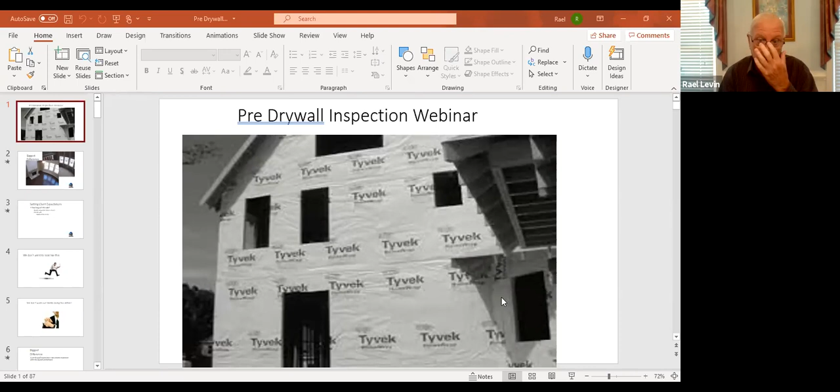So when we talk about pre-drywall inspection, we'll cover what we look for and what we see, and why it's important to do, certainly if you're doing new construction, and also on older homes on a resale if there's been a renovation or one in progress, it would be a good idea to have it checked out before the walls are covered.

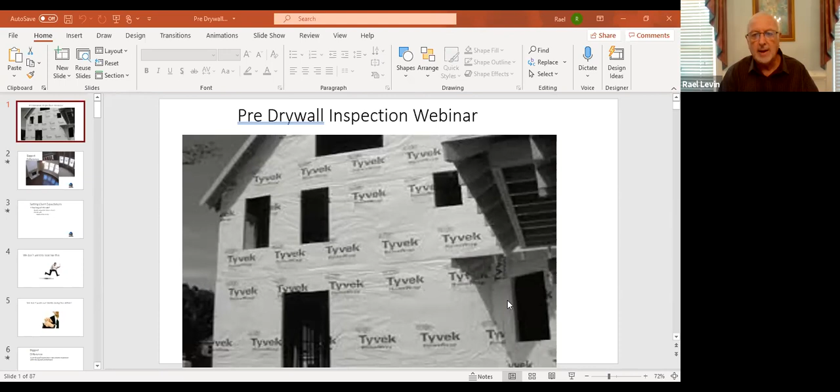So the biggest difference - let me get into the bigger slide, we'll be able to see a lot better. There we go. Okay, so here we're looking at the pre-drywall, so we're able to have a good look at the installation of everything here. We're looking at wiring, and where the fireplace is inserted. It's really important for us to see the actual structure.

Things like headers over the windows and what supports those headers. In the walls, how is the electrical wiring done? We can see our heat ducts up here, we can see our joists - this is the second story floor joist. So we can see everything when it's good and open, which is a lot different than when we actually look at it completely covered. Then we can't really have a good look at the components that are there.

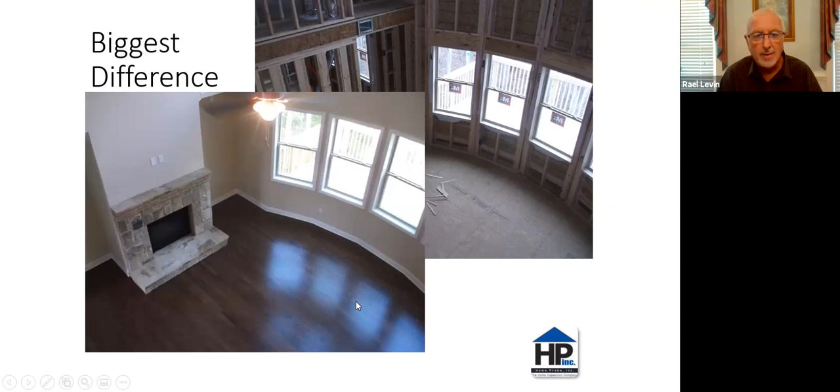What we can do is test the electrical outlets, turn on the light fixtures, and see that they're actually operating, but we don't really get to see what's behind that drywall or paneling in the walls. So we need to set the client expectations, and that basically comes down to a phone call to our office by your client, and also from you, the agent.

So they want to know, well, how long is the inspection going to take? A resale inspection's going to take about 3 hours. What we're dealing with there, in most cases, unless there's been an estate sale or perhaps a sale where the seller has been transferred for business and now the home is empty, it'll take a little less than 3 hours. We're looking at maybe between 300 plus items on this inspection on a resale that need to be checked.

We'll actually cover how that's done in just a little while, when we talk about the home inspection groups that actual inspectors can belong to and get their continuing CE, just as you can and are needed to do for real estate agents. So the resale inspection takes about 3 hours, pre-drywall perhaps an hour on site.

So we don't want to look like we're really rushing through everything. The big difference is we don't want our clients to be like, what's with the watch, what's going on here, how long is this going to actually take to get done, and they're getting bored. I can share with you one instance where I had a client where I wanted to do the home inspection.

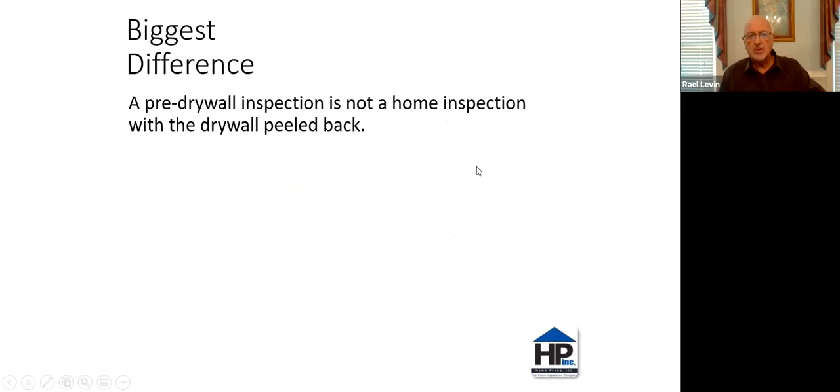So really the biggest difference is that a pre-drywall inspection is not really a home inspection with the drywall peeled back, because we look at different components and use a different criteria.

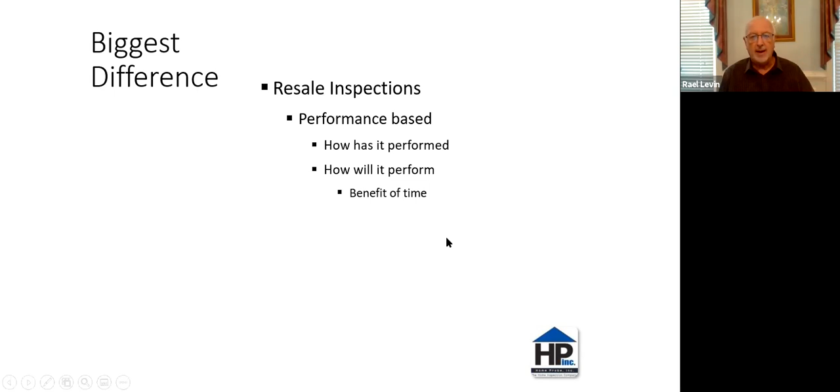Let's look at the differences between a resale inspection and new construction. Performance-based is what the resale inspection is all about — how has it performed to this point, and how will it perform going forward? We've got the benefit of time there to inform our clients about what we're looking at.

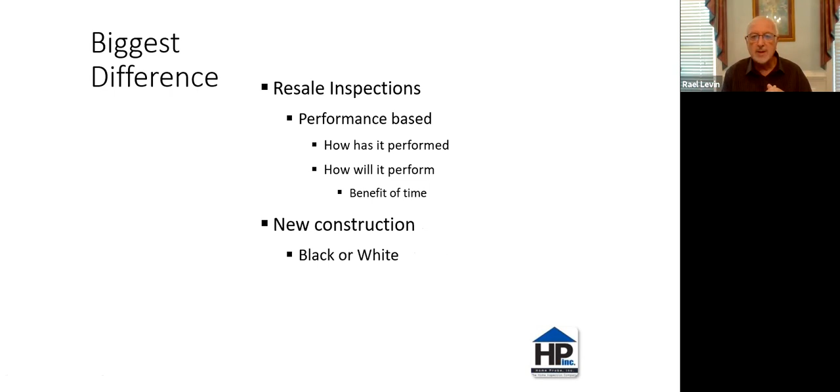With new construction, it's black or white. It's either done correctly or it's not. Has the structure been put in correctly or has it not? Are we missing some components that would be required?

So that's the difference — is it installed properly? We need to look at things like the HVAC system, the hot water heater, the electrical work. Has it been installed properly? What really overrides even the county inspections or the code is the manufacturer's instructions, because if those instructions for installation are not met, it basically voids any kind of warranty on the unit. So there's no benefit of time involved.

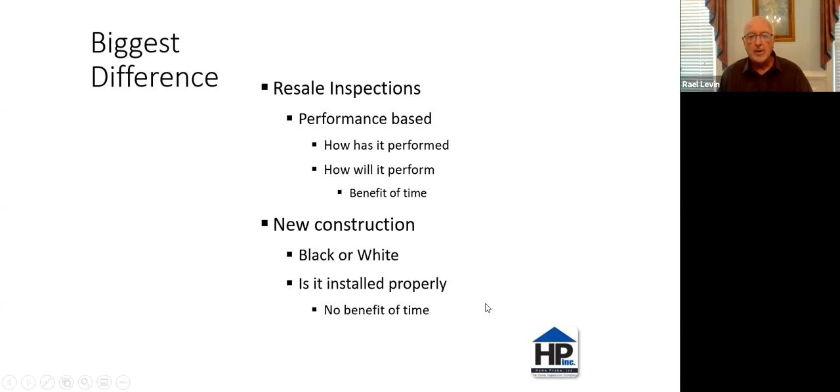Many times with new construction there will be limitations. The inspections are broken down into limitations and what needs to be taken care of — and recommendations, if there's a defect that needs to be repaired or adjusted. Those are the two main items to see in that inspection report.

So what's actually involved in new construction is we need to reference the International Residential Code. We have certified IRC inspectors in our company at HomePro, and these are the folks doing those code inspections and conformity checks for general code compliance. Bear in mind every county and city adopts their own portions of the IRC into their own code, so there are tons of different interpretations of the IRC depending on the county or city you're in.

So the largest investment of time on a new construction inspection is in the report writing, because we have to look up the code section or installation instructions. We mentioned we're looking at perhaps an hour on site, looking at the structure and components installed, making notes and taking photographs for the report. Then we have to go back to our office and look up the code sections or installation instructions in case there were issues needing to be addressed. Clients aren't really aware of this — a lot of times they think he just looked around and was out of there, and that's not the case.

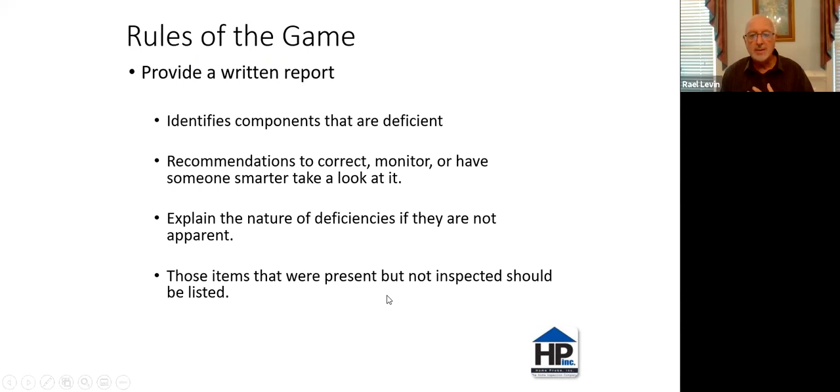The whole idea is that the inspector shall inspect the readily accessible, visually observable installed systems and components listed in the standards. With new construction and resale it's the same. We need to provide a written report that identifies the components that are deficient, and recommendations to correct or monitor - have somebody smarter than us take a look at it - explain the nature of the deficiencies if they are not apparent, and those items that were present but not inspected should be listed. So that would be a limitation.

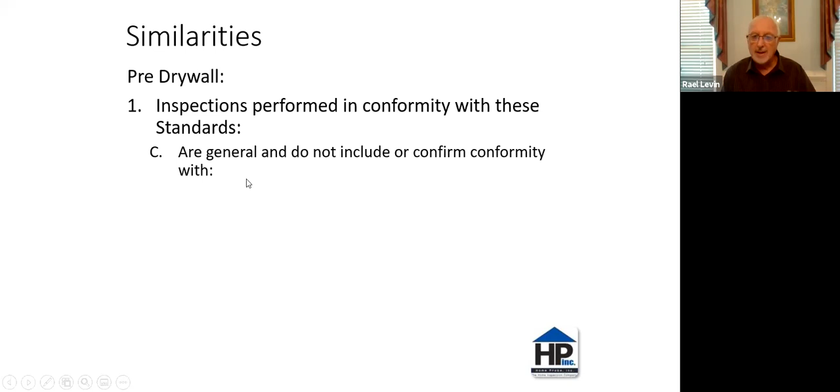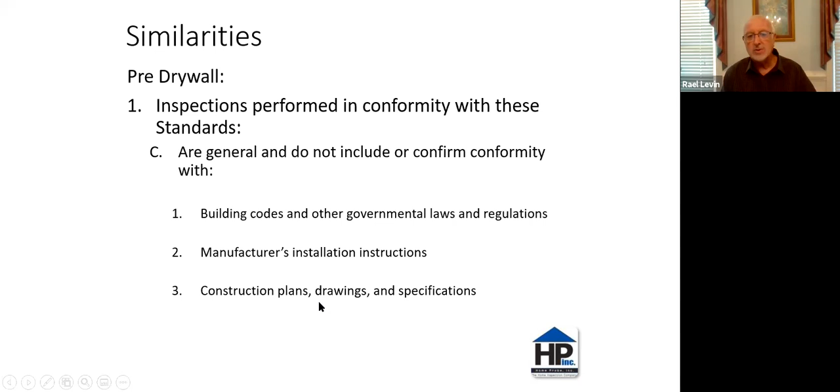Pre-drywall inspections are performed in conformity with the standards, but they're general and do not include or confirm conformity with building codes or other governmental laws and regulations, the manufacturer's installation instructions, or any construction plans, drawings and specifications. Why would we say we're not inspecting for code when we do a pre-drywall inspection? Because to the client, and to the actual builder, enforcement isn't an issue for us.

So then why is it required? It's still an education, and we're explaining what we're looking at, why it's there, and what it actually does.

That's great for perhaps a component like a furnace or a heat pump in the attic - we're cutting down on some of that heat, so the ductwork doesn't get as heated, and in the summertime it can carry that air-conditioned air a lot more efficiently through the attic. It's also fun for the inspectors, who get a drop of perhaps 10 to 15 degrees cooler in the attic when we get up there to inspect the unit.

So all these kind of questions that might come up from a client while we're there. Why would we need to do a pre-drywall inspection? Well, here's a typical example.

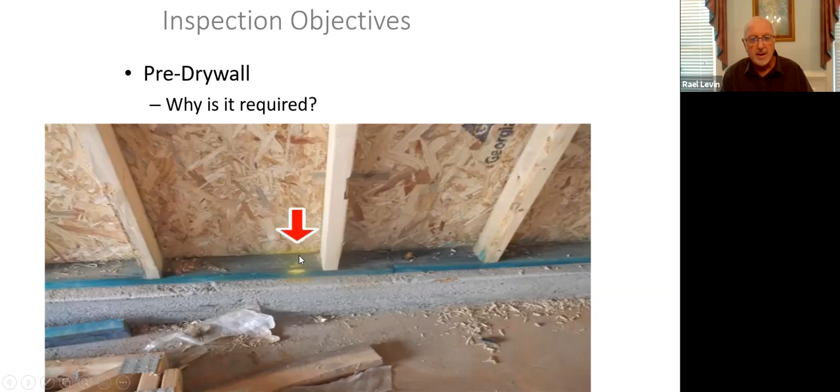Looking at the actual sill anchor spacing, there should be bolts on 8-foot centers in Canada or 6-foot centers here in the USA, and the bolts needed to be within 12 inches of the corners or any joint in the bottom sill plate. You can see here the anchor bolt, nut, and washer which holds the sill plate in place, installed in the poured concrete foundation when the concrete was originally poured.

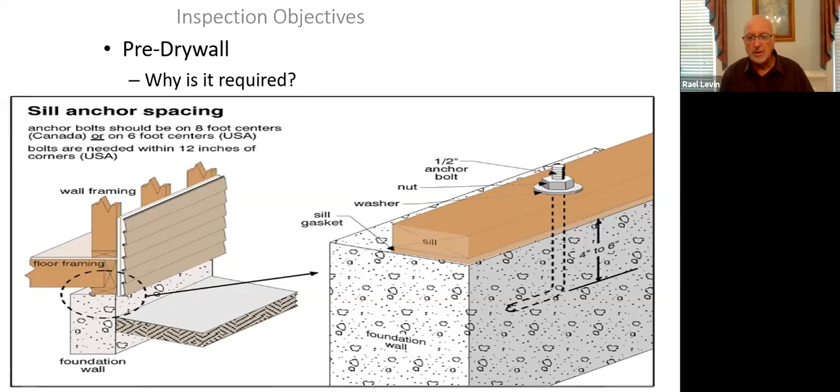So why was it there? Simply because over the years in our area we see high winds, tornadoes, etc. The installation of these bolts, nuts, and washers holds the sill plate and the whole structure together and protects it when winds come through. When the wind blows, it creates pressure or suction and sort of lifts or tries to lift the structure off of the foundation.

You can see in these schematics below how there's an uplift or shear that can actually move the whole house off of a foundation. It's not uncommon during a storm that this may happen. So that's why those bolts are there.

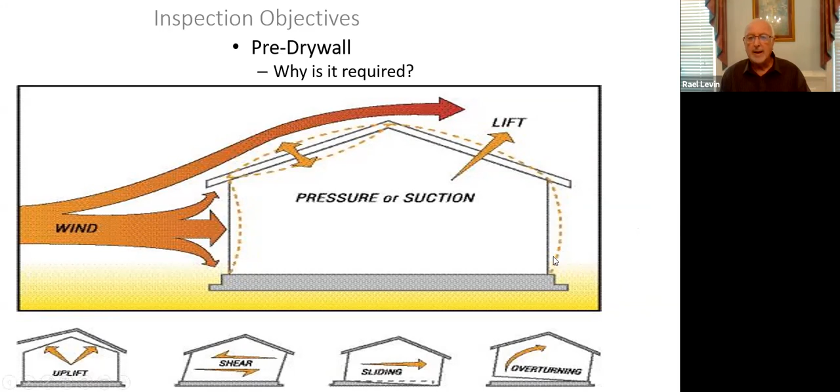Also, something that's been around for a while is what we call fire stop—fire foam or rock wool. In all the gaps or holes wherever something's been drilled through the wood structure, we install this, you can see it's orange here, which stops and slows down flame or heat coming through from one level to the level above if the fire is below.

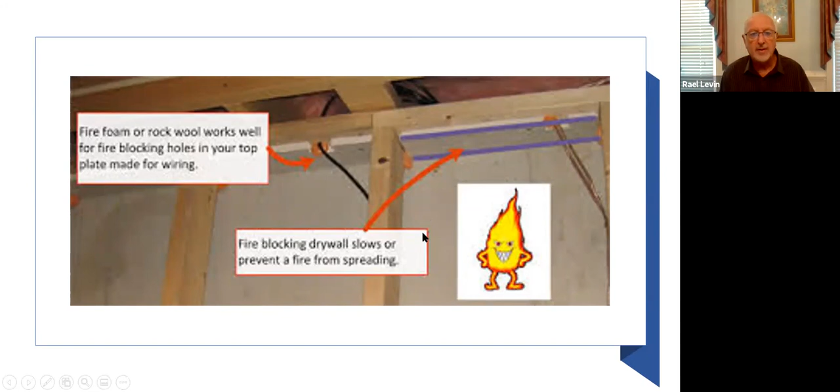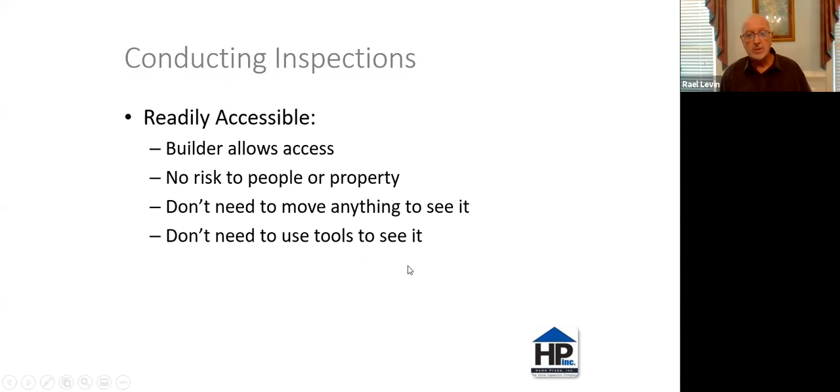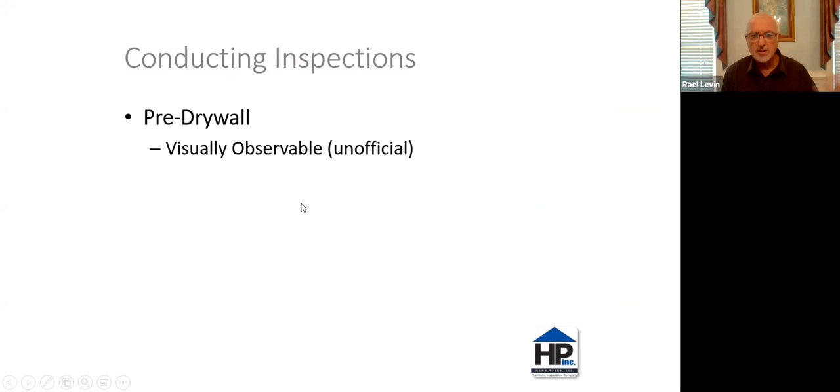We have to remember our standards: everything must be accessible, visually observable, installed components, but they have meaning. The builder needs to allow us access, and there needs to be no risk to people or property. We don't need to move anything to see what we need to look at, and we don't need tools to see it. Perhaps we don't even need a ladder taller than 12 feet to see the components we're looking at.

Pre-drywall, unofficially explained, is a visually observable component located in a readily accessible location. It's viewable by an unaided eye from a single perspective at a level of detail sufficient to permit inspection. If there's a tiny entrance to the crawl space we can't get into, that would be a limitation. Perhaps the level from the bottom of the floor joist to the dirt wasn't high enough—24 inches is the requirement. All of those things would prevent us from actually doing it visually, and that's the whole idea: we want to do that visually observable inspection.

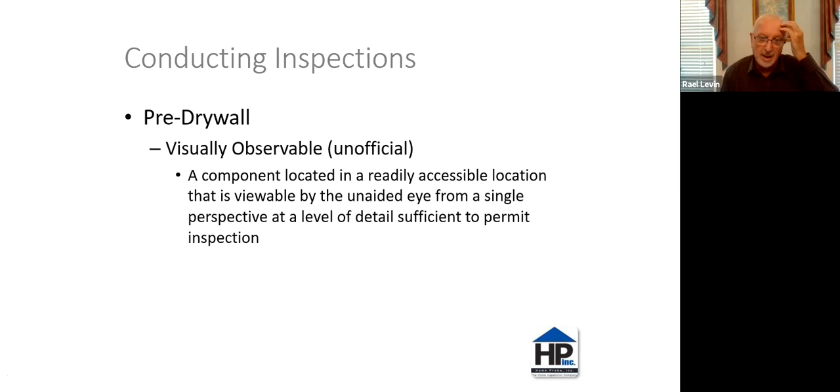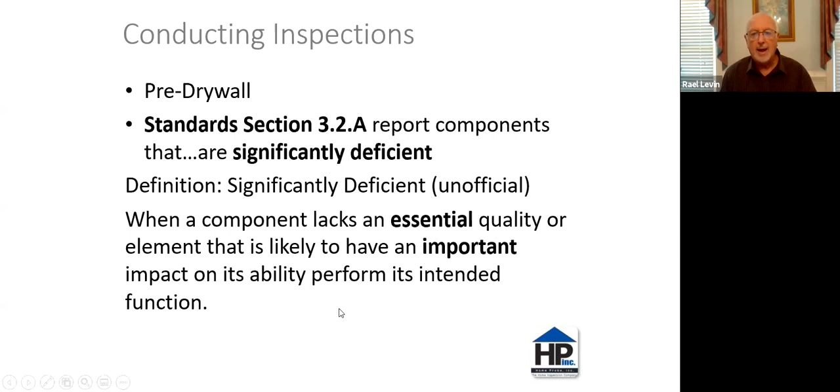We report components that are significantly deficient. So what is actually significantly deficient? Basically, it's not working—it lacks an essential quality or element likely to have an important impact on its ability to perform its intended function. Something simple might be that the AC unit outside wasn't topped up with refrigerant, so the AC system wasn't working. Perhaps there was some kind of defect with the thermostat that wouldn't allow us to run the HVAC system.

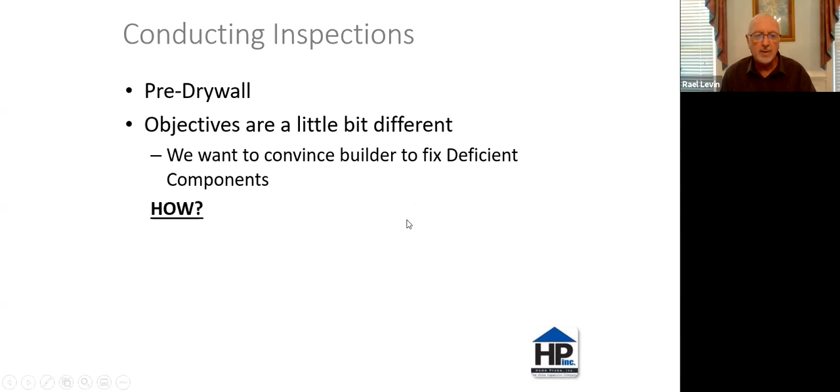But the objectives are a little different—we want to actually convince the builder to fix the deficient components. So how do we do that? We would cite the generally accepted construction practices.

So what is that? Well, material that's published by generally accepted standards writing organizations. We select the standards, and they should be written from an authoritative source.

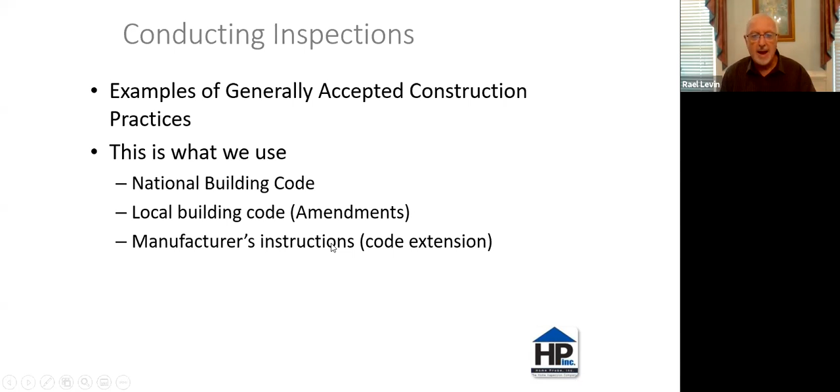And this is what we use: the National Building Code, local building codes and amendments, manufacturer's instructions or the code extension, and all the different types of home inspection groups like ASHI, National Association of Home Builders, etc. Also, Brick Industry, Engineered Wood Association, American Wood Council, Gypsum Association, National Association of Home Builders guidelines, research center documents, manufacturer's instructions. So there's a lot of different stuff, specifically when you go into new construction and pre-drywall.

When we report the deficiencies, we need to identify that deficiency, describe why the client should care if the deficiency is not corrected, if it's not self-evident, and recommend the correction, the evaluation and monitor. It's important to give direction, of course. And this is why we give a cost estimate in our inspections.

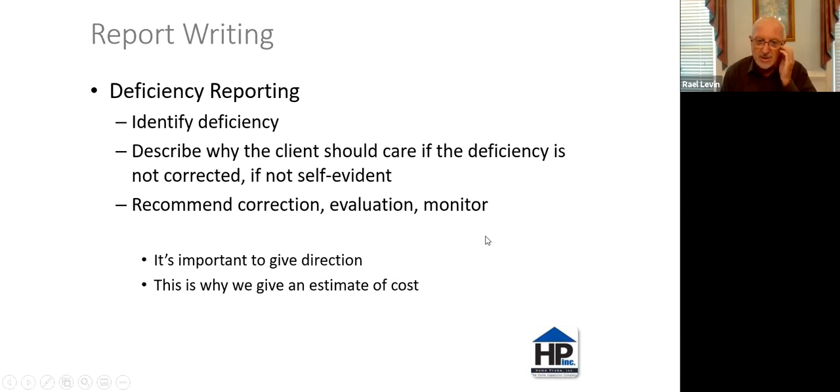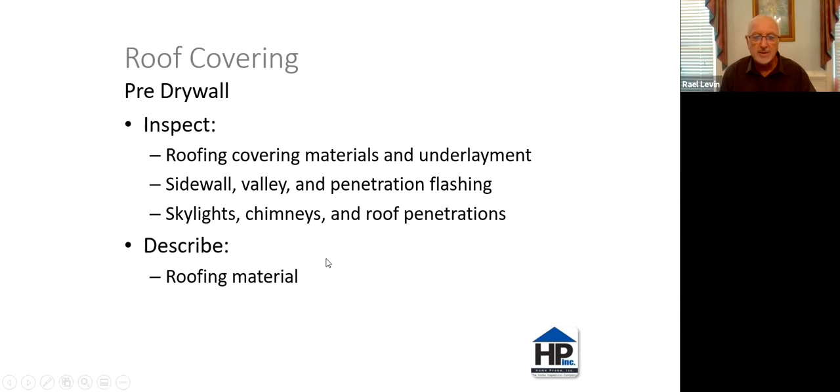So we would cite standards used in general. Okay, so pre-drywall, we're looking at roofs here. We inspect the roof covering and the underlayment, the sidewall, the valley, penetration, flashings, skylights, chimneys, and roof penetrations. And we need to describe the roofing material and how it is inspected.

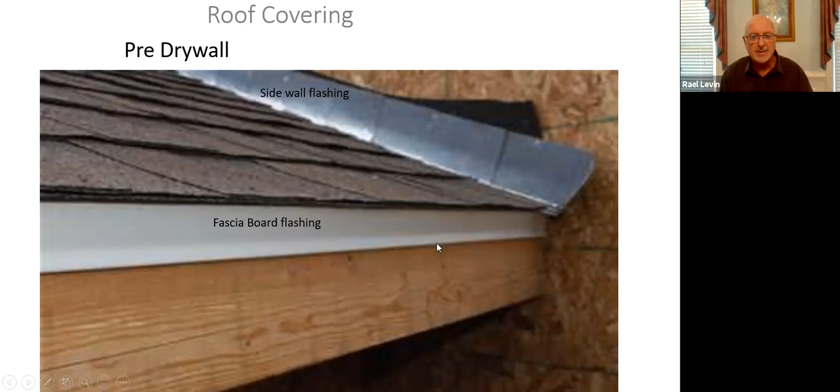And then on the front here, the fascia board, it's actually a fascia board flashing that goes between the sheathing of the roof and the fascia board itself. That's a fairly new application in the last, say, 5 to 10 years. Prior to that, they used to just have the fascia board, and there was a little gap between the actual fascia board and the roof sheathing, which is a great place for bees and for little critters to be able to crawl into the attic space. Bats, etc., would all be able to get in through those little spaces.

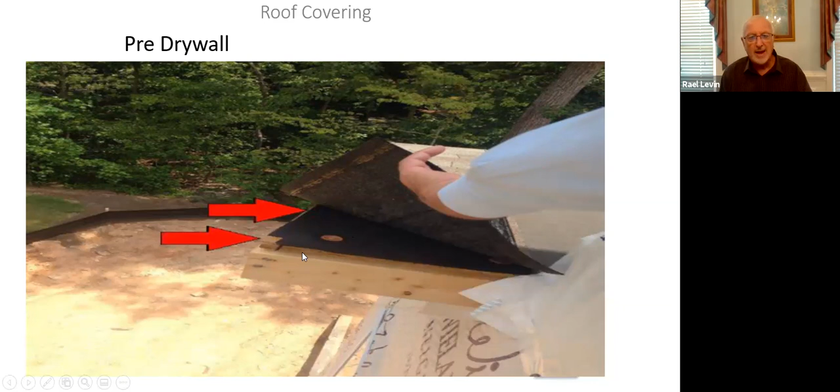Okay, we're also able to lift up the shingles. As you can see here, we're looking at some raw plywood, and there is no flashing here, so we'll be able to call that out and have that taken care of.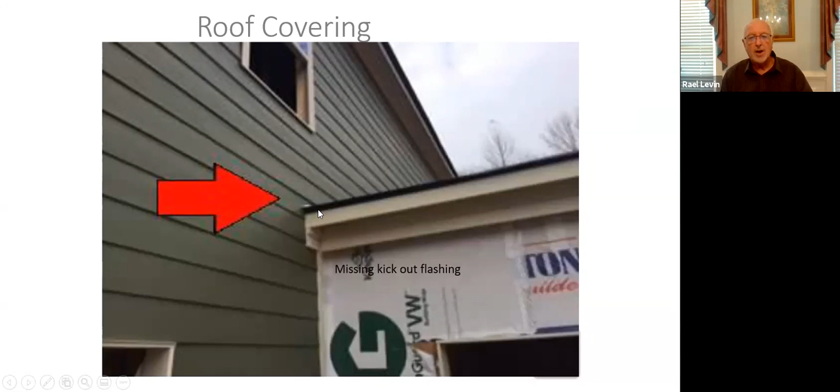In this particular case, we're looking for the missing kick-out flashing. Kick-out flashing is basically a 90-degree flashing that would go here at the last edge of the siding, turning to what we're looking at to the right, where you see the red arrow pointing, that would stop water from running off the end of the roof and running down the side of the house here. Obviously, there would be a gutter installed here, and that kick-out flashing would divert any water coming down the gutter along the roof at this point into the gutter.

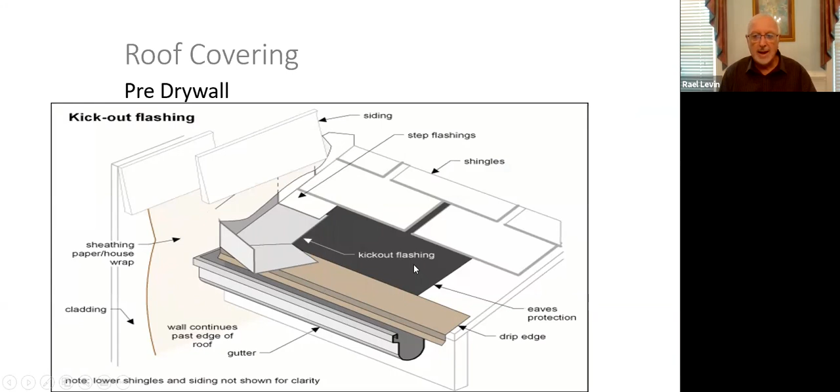You can see here how it actually works. In this particular case, we're looking at the house wrap or sheathing that's on there, and we have our flashing installed, and here are our shingles. So that's a good look at how it actually takes place.

Rarely do we have the benefit of time with pre-drywall, but sometimes we get lucky. There's been rain, and there've been some areas that were penetrated, so we go ahead and see what goes on here.

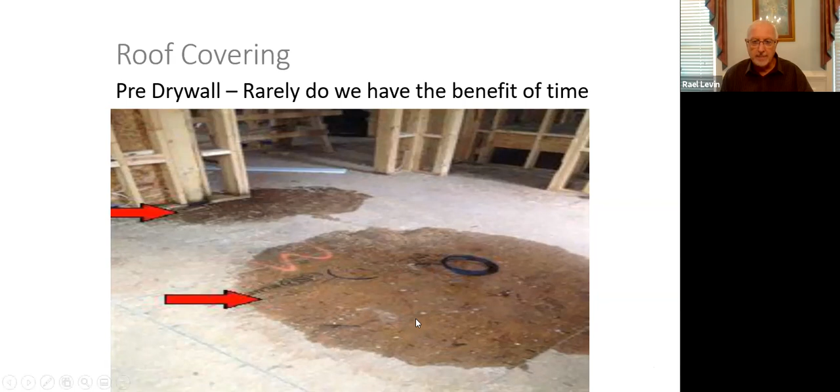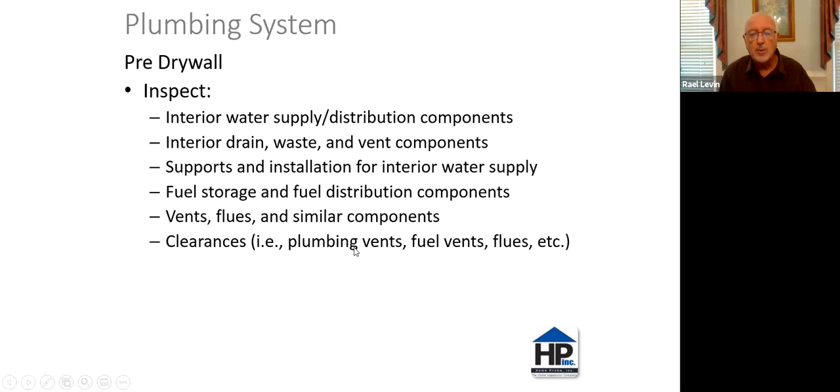And all the clearances. So today, most new construction in the lower price ranges, perhaps below 500K, we're looking at PEX, which is a plastic water supply. So we want to be sure that nothing is too close to any kind of vents from the HVAC or a hot water heater that may have been gas that are involving heat. Certainly also plastic piping around recessed light fixtures that put out a bit of heat as well could cause a melting issue on our plastics.

So we'll describe all of the drains, the waste, and the supply, as well as the vent piping and the water heating equipment and the location of the main water and fuel shutoff. Let me see this thing right here.

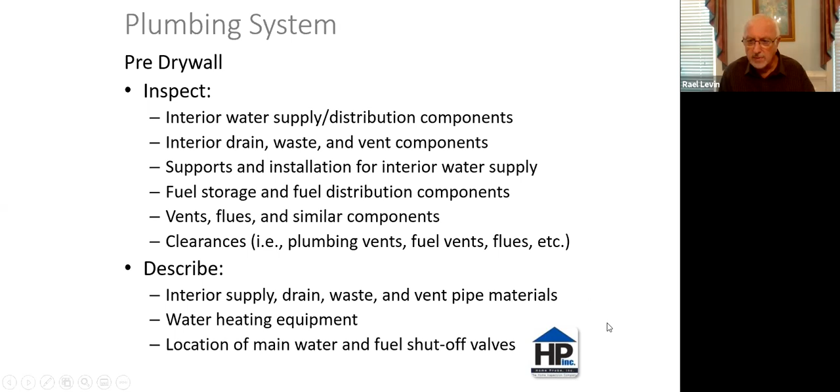See if I can't just move this out of the way. I don't see anything right now.

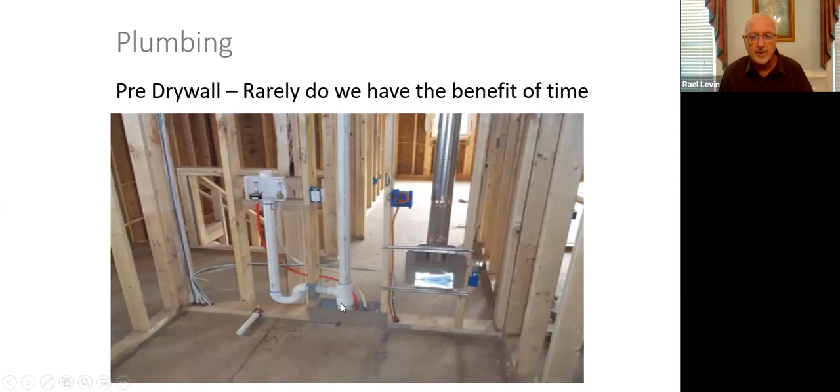Rarely we do have the benefit of time again on pre-drywall, but here we are. We're looking at all the components, making sure everything is installed the way we want it to be. But builders are also thankful to us when we do point out things.

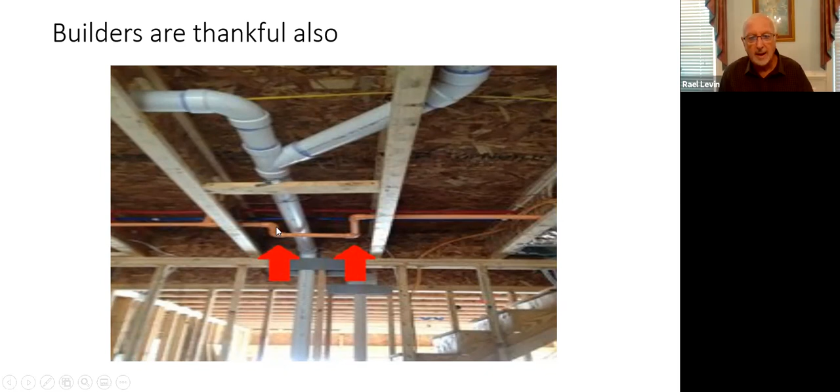Here in this condo we've got a water supply line for our fire sprinklers, and they've dropped that below the actual beams, so the drywall would be blocked. They would have needed the installation to be above the PVC water drainage instead.

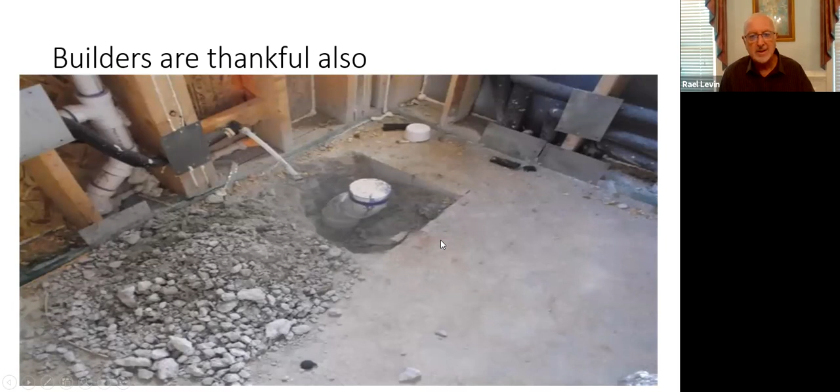Again, lucky we found a leak on the water system as well.

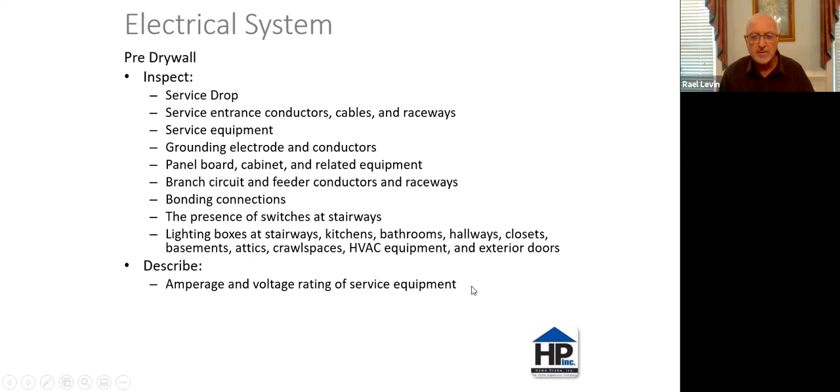Electrical system - we're looking at the service drop, etc., all of the components involved in the electrical system. We're also going to describe the amperage and voltage rating of the service equipment and the secondary panels, and where they're located.

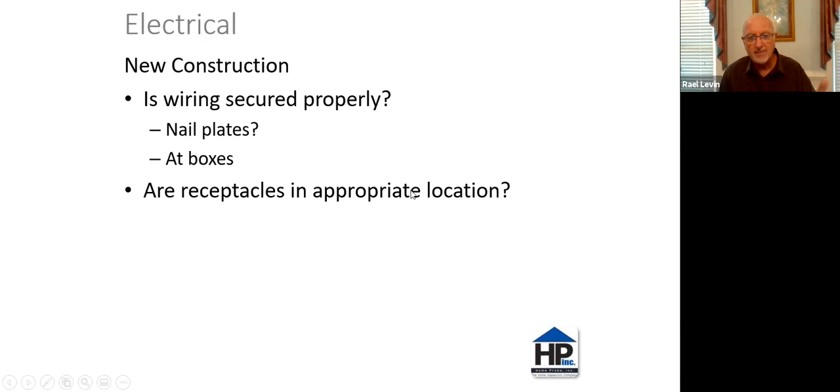We want to make sure the wiring is secured properly. Does it have nail plates and boxes? These are the openings that would be in the actual panel.

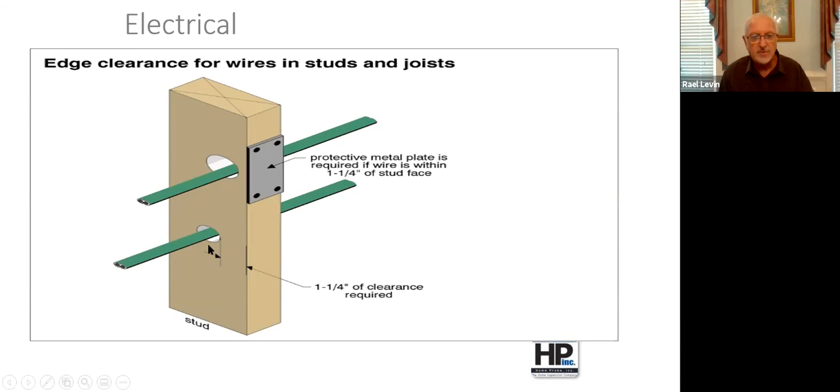We want to make sure the wiring is protected. We need a 1 1/4 inch recess, or we would need a nail plate. If it's actually recessed further into the stud, we would not need the nail plate. We'll be checking for that.

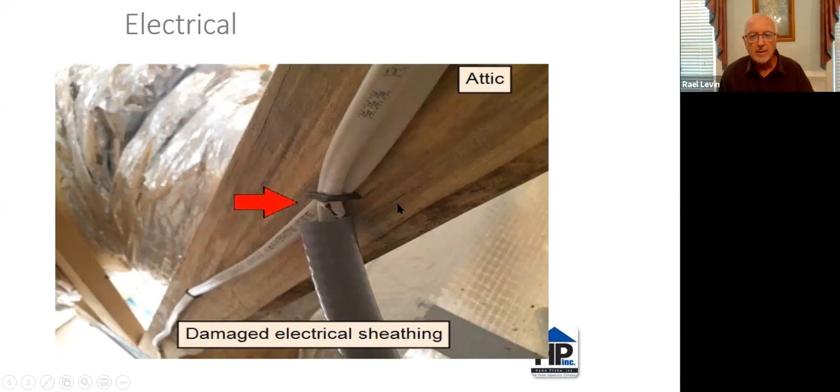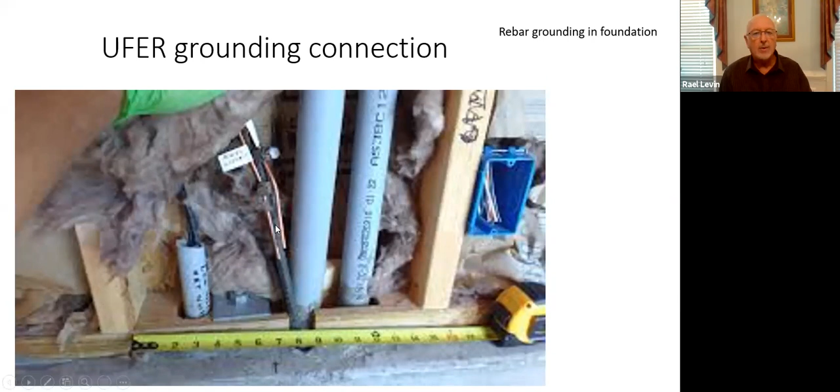Most new construction now has UFER grounding. In the old days, we would ground to a copper water pipe or galvanized steel water pipe, or have a rod driven in outside in the yard somewhere.

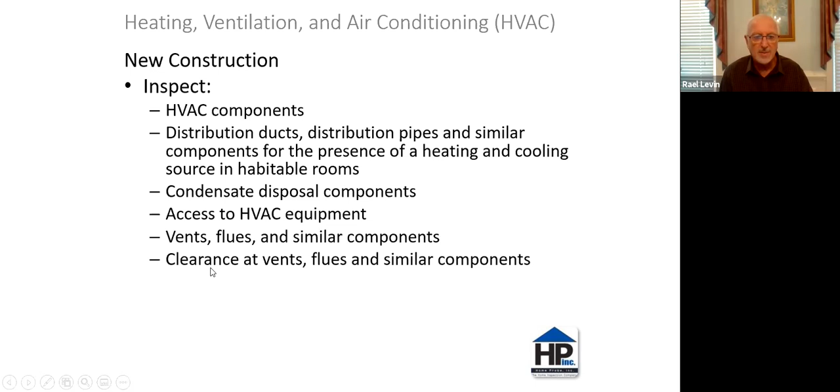New construction, HVAC components - all of the ducts, the distribution piping, etc. Condensate disposal components, access to the system, clearance at the vents, etc. What kind of system is it? Is it electrical or is it heat?

At this point, perhaps there's a limitation that there's no power on at the home, and we couldn't test it. So there we are.

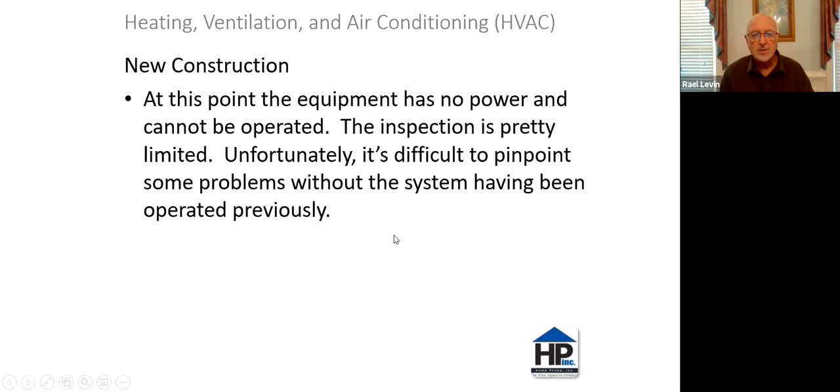A couple of the other things - missing some sealant right here at the main plenum, ductwork that's become disconnected or not sealed correctly. Interior stairways - headroom, treads, risers.

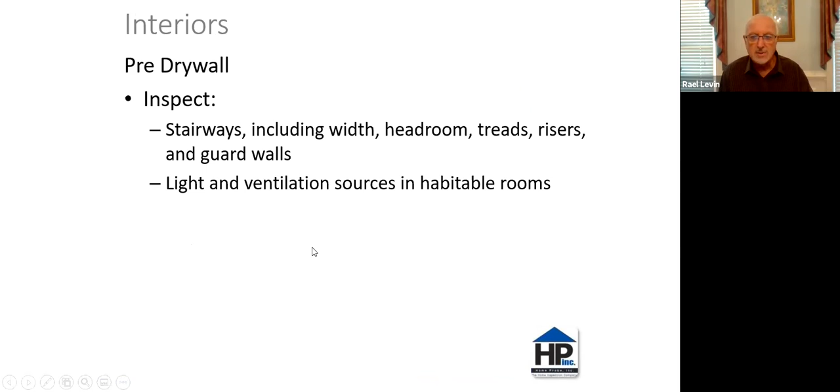We're looking at, right here, a 10-inch minimum for a step tread, 7 3/4 inch maximum height for each of the steps, and no more than a 3/8 inch variance. I mean, 4/8 of an inch is 1/2 inch, so less than 1/2 inch variance between any of the steps on the flight of steps.

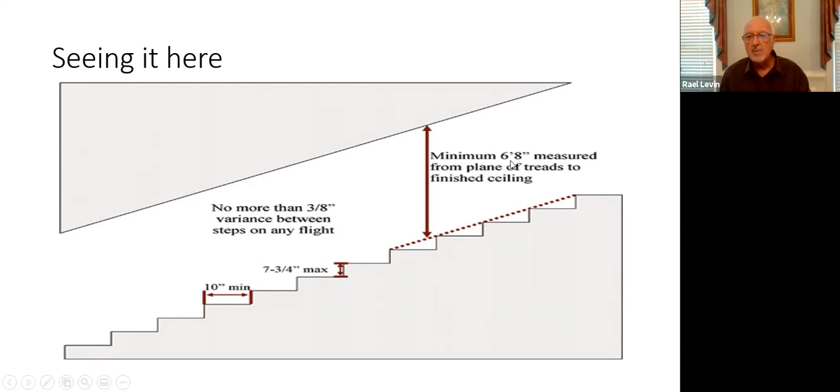Again, from the plane of the step to the ceiling, a minimum of 6 feet 8 inches. So it's a lot better when we're looking at the unfinished construction process.

Much better to find it there than here. You can see it's just a short riser, another short one, and then we start getting larger and larger. In this particular case, it was a matter of—

There was an attic that had been vaulted and extended to have living space, but you can see here that it wouldn't have met the standards because of the varying heights of the risers.

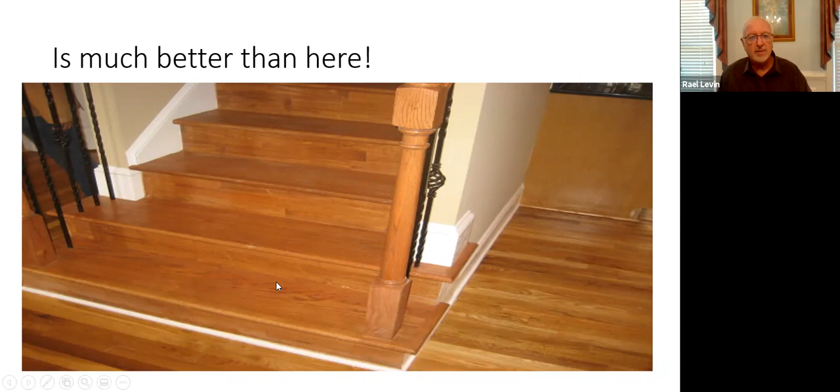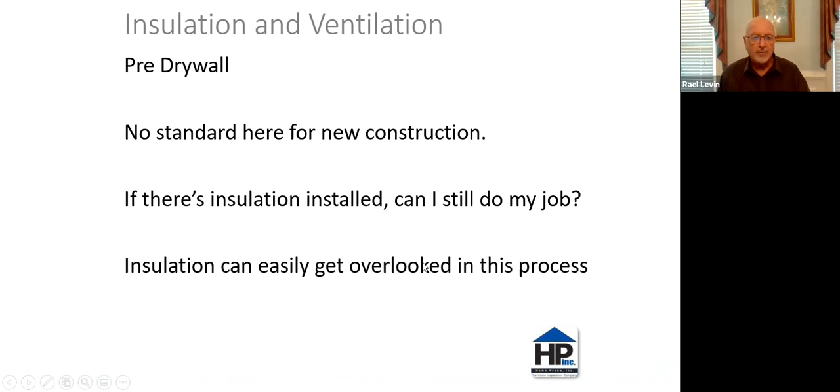There's no standard, pre-drywall, for insulation and ventilation. And if there's insulation installed, can I still do my job? For sure. Insulation can easily get overlooked in the process.

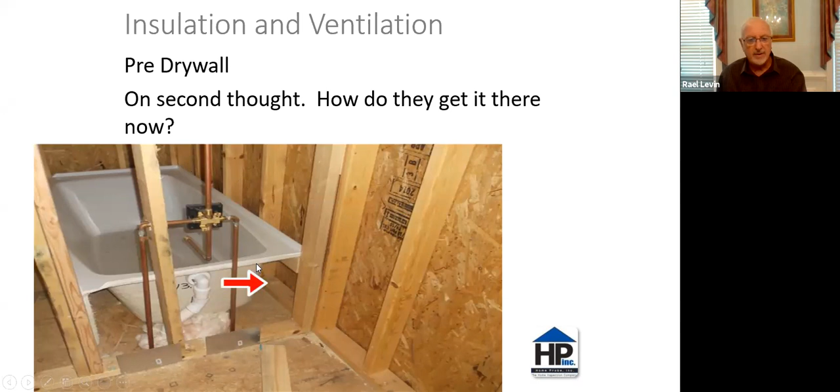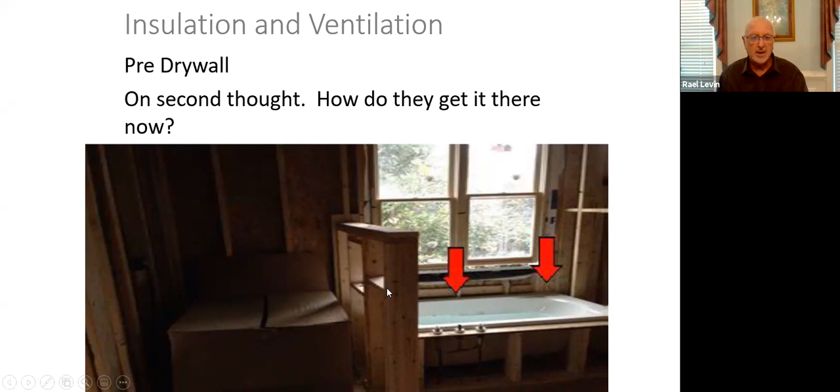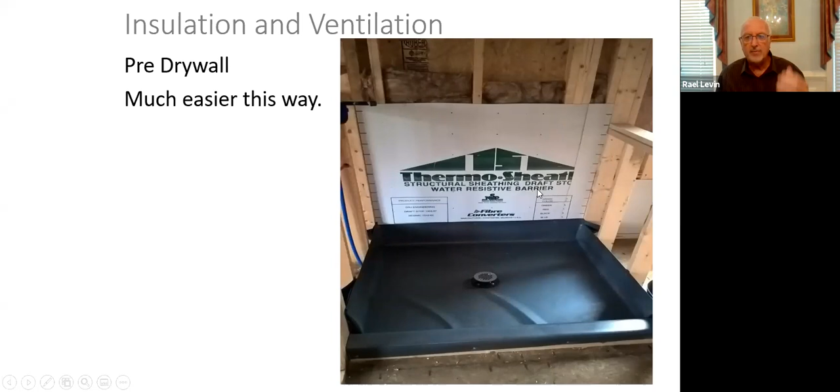Same here where the jet tub went in, hard to get that insulation in there. This is a much better way to do it, where you can actually see the insulation is installed first, and then we've gone in and gotten our water resistive barrier before the green board went in.

Okay, so for resale, everything's grouped under structural components. Pre-drywall, it breaks out separately into the foundation, floor system, wall, and roof system.

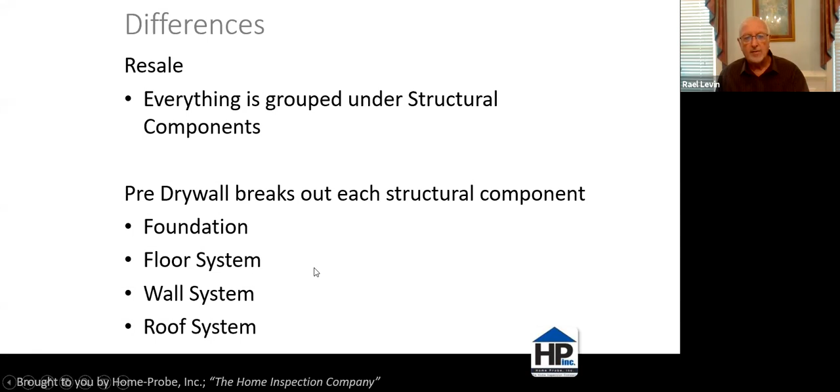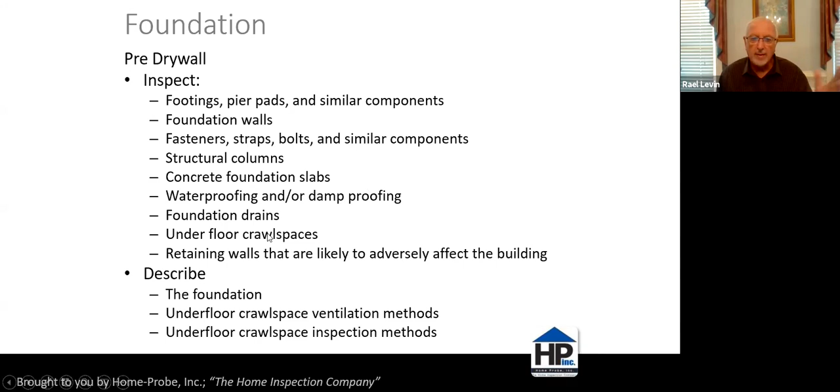So we'd inspect all the footings, pier pads, similar components, foundation walls, all those fasteners and straps that I talked about, bolts and similar components, concrete foundation slabs, waterproofing foundation. So you can see there's a ton of stuff that goes into it.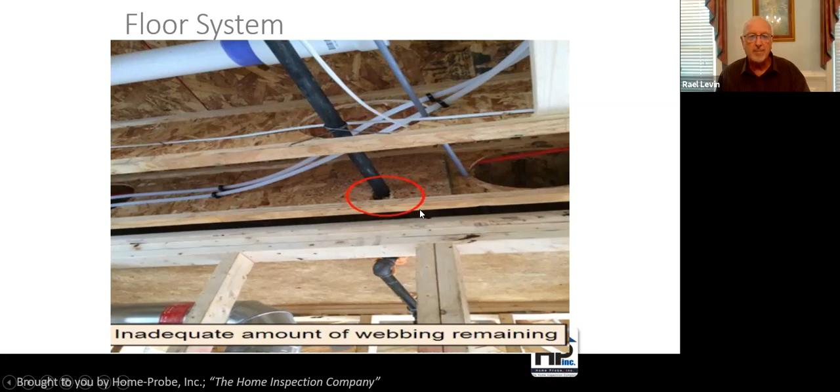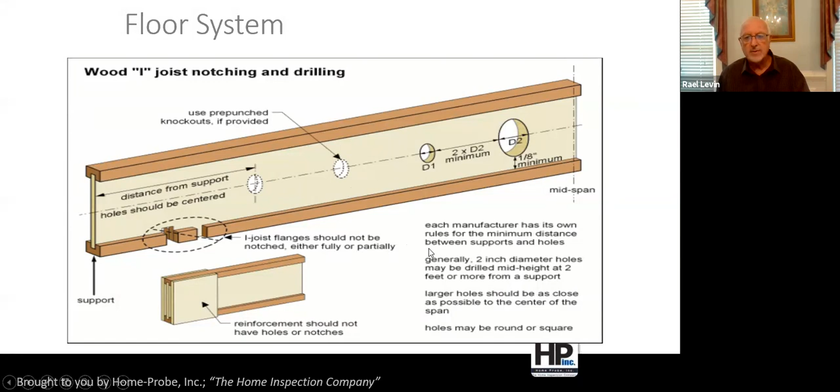Obviously, when it's open like this, we can see where things weren't taken care of or installed correctly. This one's been cut too close to the bottom panel. Actually, in the delivery of I-joists, there's a schematic that comes with the joists themselves to the site, which shows where the drilling and openings can be done.

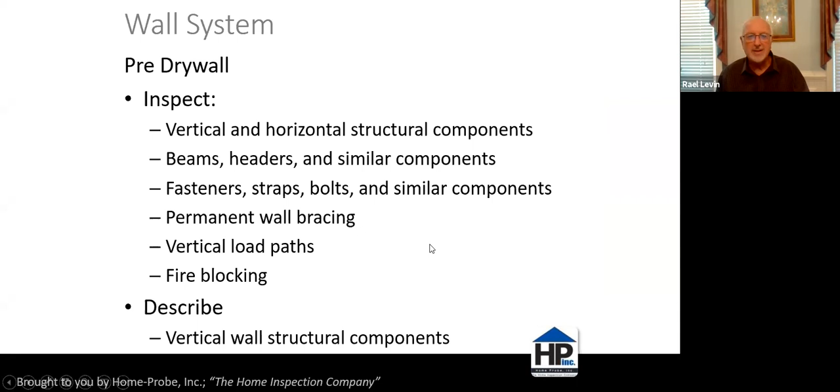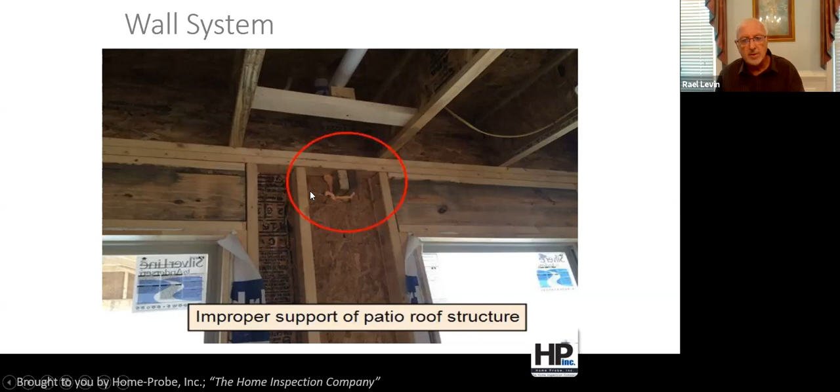We're past the 30-minute webinar, but I just want to finish, so please hang with me. We're inspecting all the beams, etc. Here we have a picture of support for a patio that actually came through just the plywood wall. This one's sticking through there with no support. There should have been a horizontal structural piece here to hold it and give it more support.

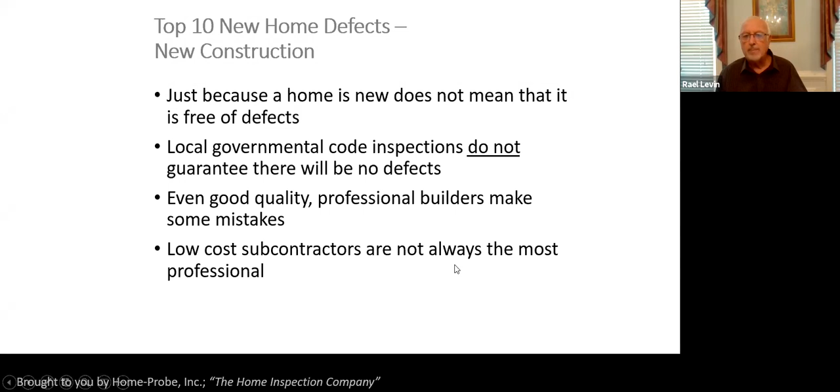So just because the home is new doesn't mean it's free of defects. Local government inspections do not guarantee there'll be no defects. Even good quality professional builders make some mistakes, and low-cost subcontractors are not always the most professional.

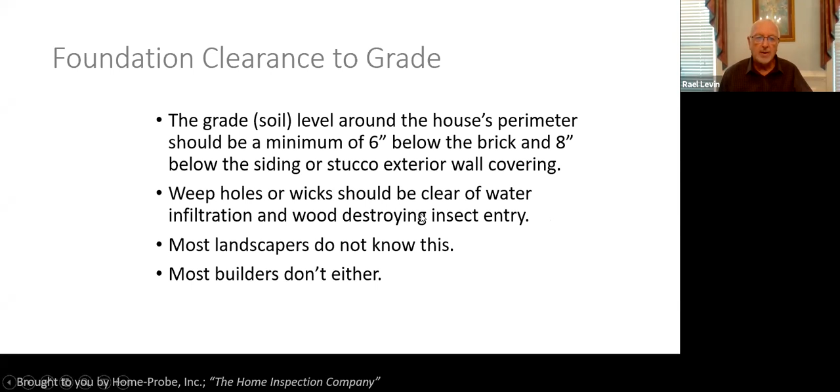So looking at even foundation to grade, 6 to 8 inches - 6 inches below the brick, 8 inches for siding or stucco. Weep holes or wicks should be clear of water infiltration and wood-destroying insects as well, like termites.

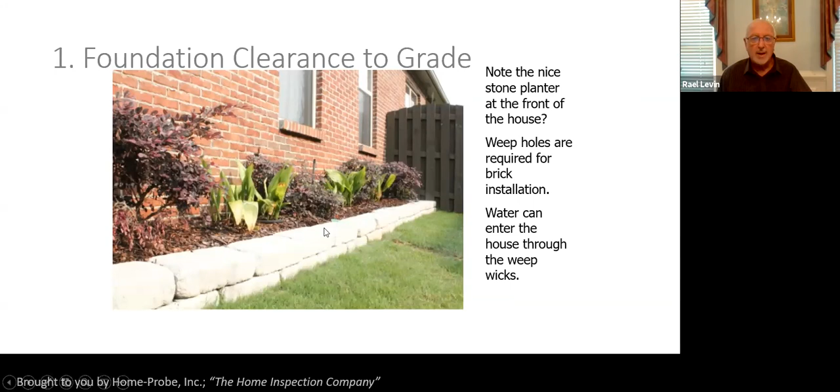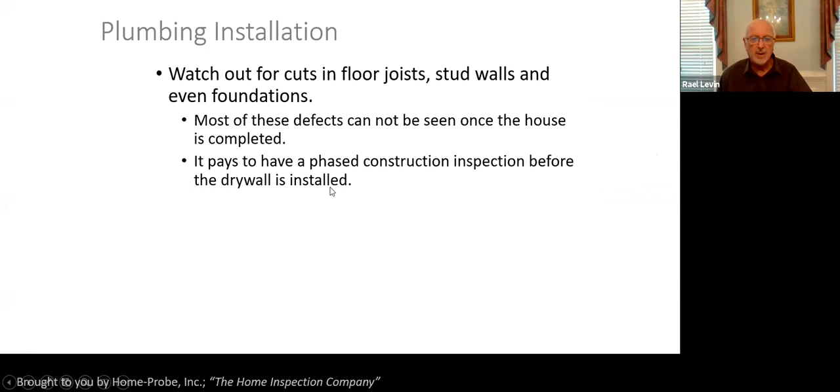So these are all things that we have to watch out for. Some, even on older construction - the plumber went through and just cut the joists over there.

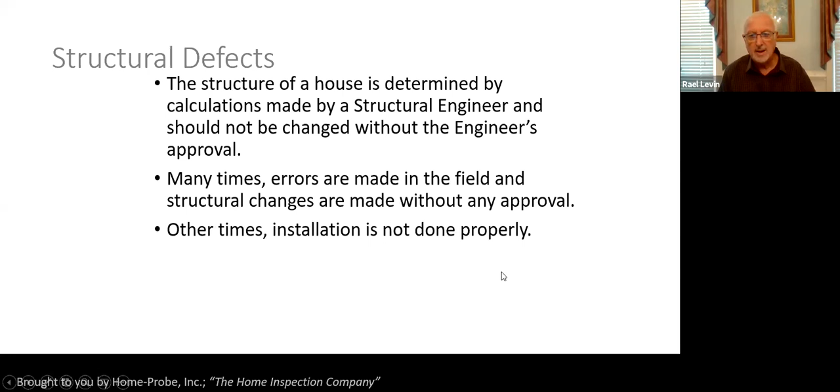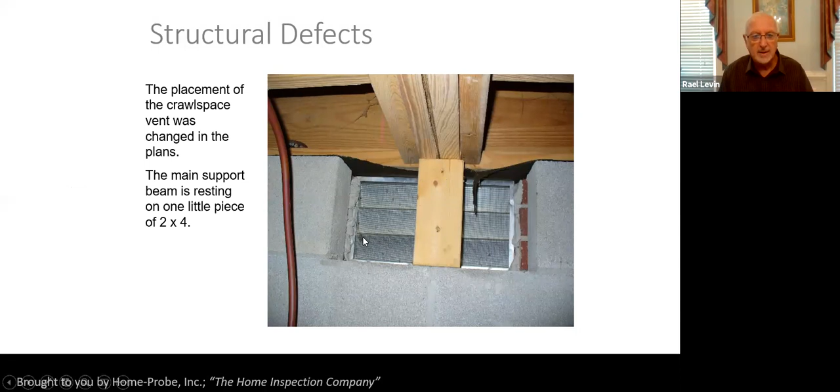This is a whole floor system that's supported on one piece of 2x4 because they moved that vent in there. And this had just passed the local municipal code inspection.

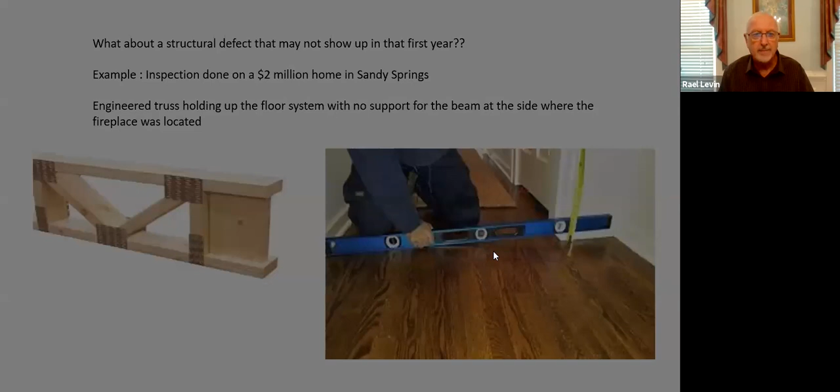What actually happens when things aren't supported correctly is you can see the settling here, which happened just after the inspection had been done by the county. So, last-minute changes - we don't like to see those - just plain bad luck, things that are kind of funny that we find.

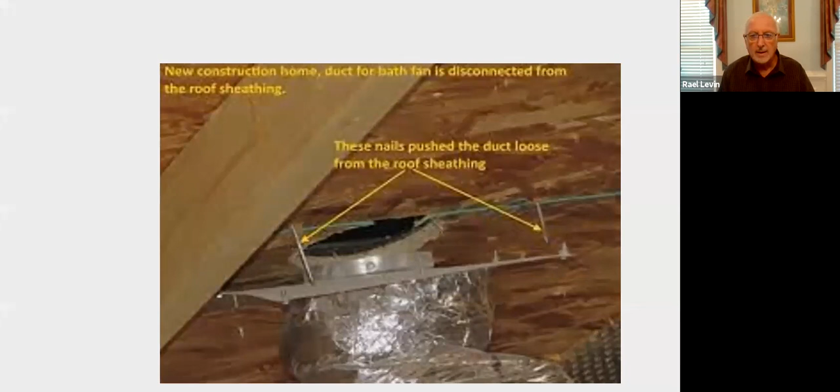Okay, so yeah Natalie, that's what we were talking about, where we have to look. Rael, will you just read the question, sorry, just so people know. Okay, so the question was: if something is not built to code, you as the inspector won't be able to recognize that - who's responsible for ensuring the home is built to code, or that the builder met the manufacturer's instructions?

And that's up on us. So when we talk about our inspectors - let me just change this, there we go - when we do the inspection on new construction and our inspector is IRC certified, then we will be pointing out those things. That's why I mentioned in the presentation that the looking up of the issues is involved, and that's where most of the time is taken up in order to point out these issues. As we mentioned, perhaps the enforcement would be an issue, but if we could explain to the builder and cite the actual code violation, then it behooves him to go ahead and make the changes. At that point, it would be up to the builder to perhaps question even the city or the county and move on from there.